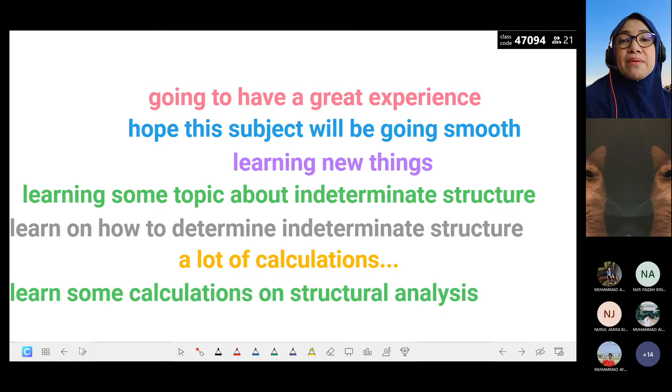Have you heard something about this course previously, from senior maybe? Ada. So what did you hear? Senior cakap susah, senior cakap susah. Quite challenging but interesting. Okay, insyaAllah. Most important thing is you need to actually have strong basics from previous courses, especially from solid mechanics.

Not all topics, certain topics only, especially the beam topic in solid mechanics, as well as some of the topics in the previous indeterminate structure course. If you have all these basics, so this course should be better.

Okay, so this is another question for you to participate. I want you to name, as far as you remember, the name of the topics that you have learned in solid mechanics as well as in indeterminate structure courses. Topics that you have learned previously, whatever topic. Can you please name some of them?

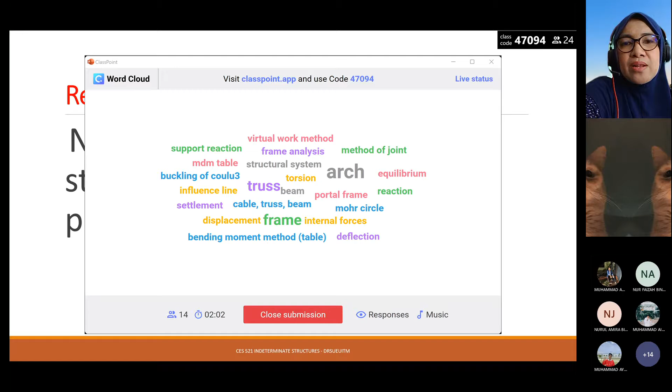Okay, you learn something about equilibrium equation. You use equilibrium equation to determine reaction. Ada reaction kat situ. Method of joint to calculate member forces in truss. Support reaction, so it come from support. Method of section, another method to calculate member forces in truss. Ada lagi?

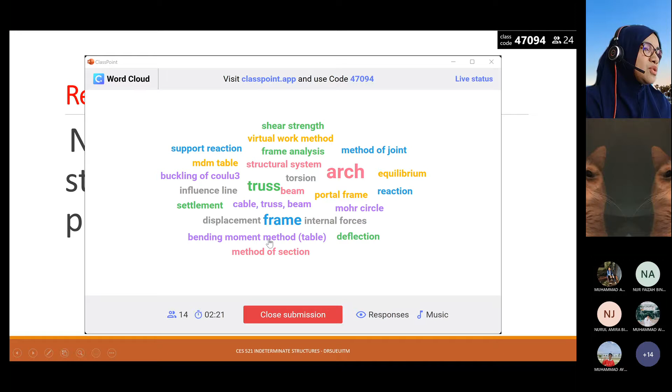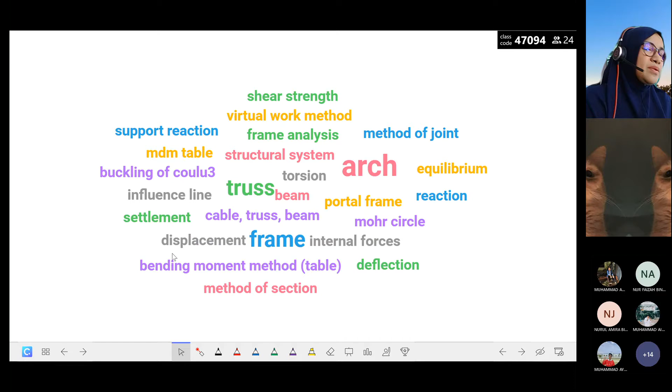Okay, that's good, so this one I want to close right now. Alright, paling ramai jawab arch eh. Okay, so we move to.

Type of determinate structure you have learned previously, some dia dah jawab tadi kan. Okay, because in previous courses, some of the name of the method is actually come from type of structure itself. For example, in solid mechanic, beam as the topic, right? And in determinate structures, arch and cable also as topic, frame as topic, truss as topic.

Okay, but this time, method as topic. So flexibility method as one of the topic, followed by stiffness method, also method as topic, and the last topic in this course is moment distribution method. So all these methods will be used to analyze indeterminate structures. Means we need to analyze beam, we need to analyze truss, we need to analyze frame. For each of the topics we will cover all type of structure, but we don't cover arch and cable. So we just focus on the dominant type of structure, which are beams, frame, as well as trusses.

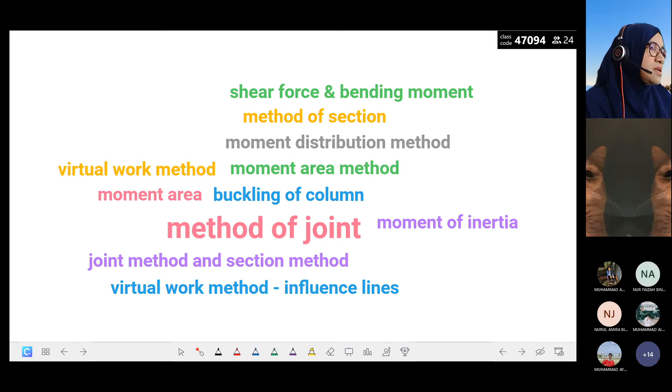Okay, we move to the learning outcome, for this chapter, chapter number 1. So at the end of this chapter, you should be able to,

you should be able to calculate degree of indeterminacy, and identify redundant for indeterminate structure.

Wait. Kita tak boleh highlight pula. Highlight ni pen ni. Kejap. I need to close this and open it back. Wait. Okay, dah boleh tu, lambat sikit. Okay, I will share it again.

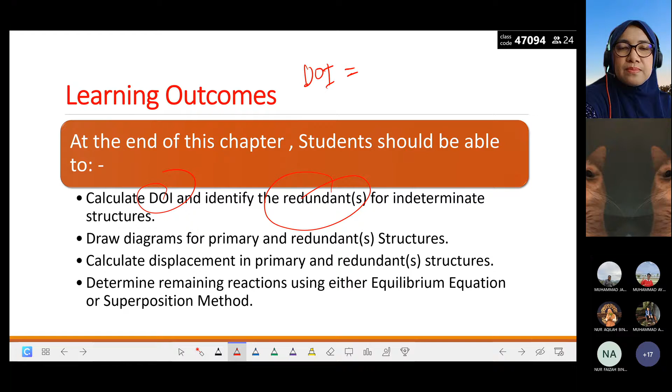So because when you learn how to calculate reaction in determinate structure, you have actually learned how to determine degree of indeterminacy, and degree of indeterminacy for determinate structure is equivalent to, do you still remember? Determinate structure, what is the value? Equal to degree of 0. Yes, it is equal to 0 for determinate structure.

So in indeterminate structure, what is the answer for degree of indeterminacy? More than 0. Okay, it is more than 0. So this is for indeterminate structure, more than 0.

Actually the value that you get whenever you calculate degree of indeterminacy represents redundant in the system, we call it redundant, because whenever we remove redundant, it will equal back to 0. So we call it as redundant.

For example, if we have beam, this is cantilever beam, the one that you have learned previously under previous course. So when I put another roller here, this is equivalent to 1. The value of 1 is actually representing redundant. And whenever we remove 1 from the system, it will go back to determinate condition.

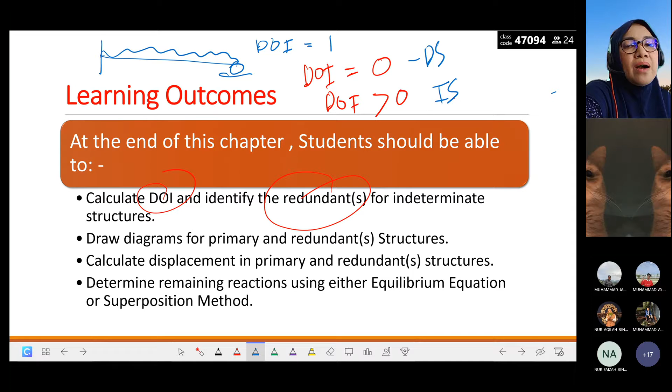Number 2, diagrams for primary and redundant structure. So you should be able to draw the diagram. So we will have diagrams called primary structure and redundant structure, and most of this diagram is actually determinate structure. Primary structure.

Primary structure is a structure after removing redundant from the system. We will analyze the primary structure, and then we also have redundant structure, which is also determinate structure. So all analysis in this topic, we will analyze all reaction, all internal forces and displacement in determinate structure. That is why you need to have a strong basic in analysis of reaction, internal forces as well as displacement, the three things that you have learned previously.

Okay, and then calculate displacement, as I mentioned just now, displacement. And finally, after redundant has been determined, then we will determine reaction in the system.

Remaining reactions means 3. Because in determinate structure, we calculate 3 unknown reactions, and these 3 unknown reactions can be determined using 3 equilibrium equations.

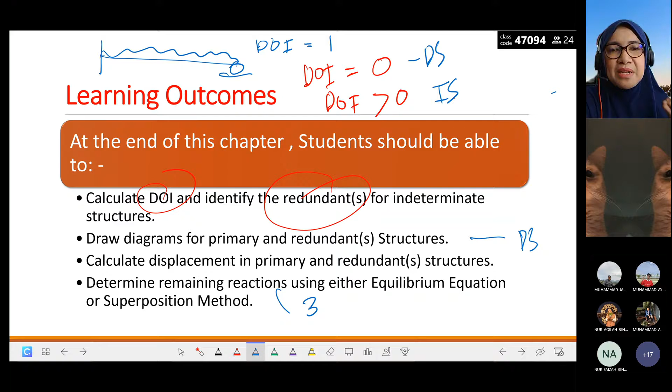If you have a question, you may ask.

So you have learned how to analyze, for example, beam. You have actually learned how to analyze reactions for beam, frame, and truss, and then you have also learned how to calculate internal forces in beam, frame, as well as truss, and then displacement. I believe you have learned how to calculate displacement in the last course, last semester.

So we go directly to introduction. In structural engineering, the flexibility method is actually the classical consistent deformation method for computing member forces and displacement in structural systems. As I said just now, this is in simple words.

When do we need to consider flexibility method? It is when we cannot determine reaction directly, because we can only determine reaction whenever the number of unknown reactions is equivalent to the number of equilibrium equations, meaning 3 and 3. When we have more than 3 unknown reactions, we cannot determine the reaction directly, and that is where the flexibility method takes place. So just remember that we are actually calculating the redundant using flexibility method, and after the redundant has been determined, then we can solve the remaining reactions.

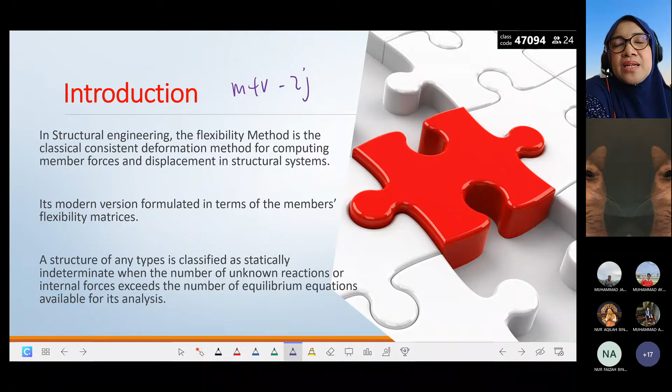So we move to this. As I mentioned just now, this is not the only topic. This is one of the techniques to calculate or analyze indeterminate structure, and flexibility method will take place whenever we cannot determine the reaction directly using equilibrium equation, because the number of unknown reactions is more than 3.

If we want to calculate the reaction or internal forces in frame, we need to consider the internal forces as well, by using the formula I showed to you just now, m plus r minus 2j.

This method is also known as force method. If you have the textbook or e-book for this course, the Hibbeler textbook, RC Hibbeler, structural analysis by Thomson, the distributor for this book, you may not find the topic name flexibility method because it has another name. It is also called force method.

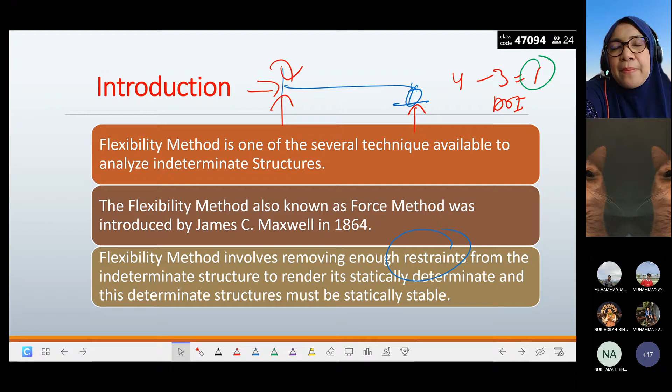Once the redundant is determined, we should be able to calculate the remaining reaction using equilibrium equations as usual. But whenever we want to calculate redundant, it is actually removed from the system. And when we remove redundant from the system, we should make sure that after removing redundant, the structure is statically determinate and stable.

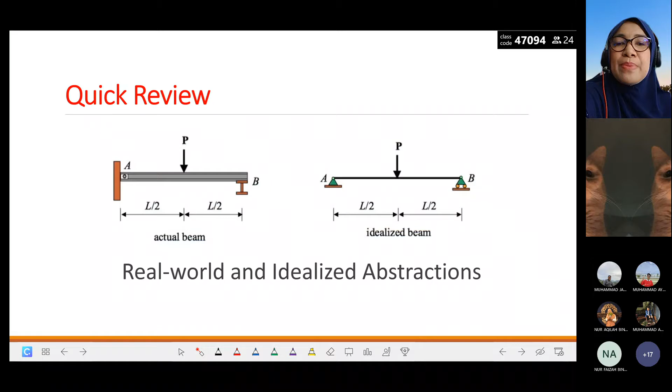This is just a quick review. The idealized beam is the one you always get in analysis, and the actual position, the actual picture of the beam. This one is called simply supported, where we have a pin and a roller.

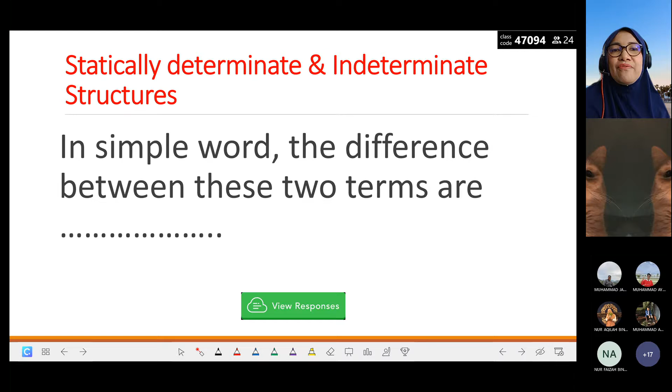So I want to ask your understanding. In your own words, what is actually the difference between these two terms - the difference between determinate structure and indeterminate structure? Relate it back to what you have learned previously and today. Please try to respond to this question.

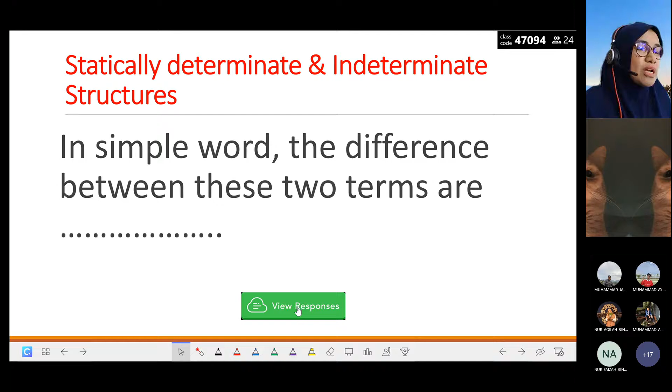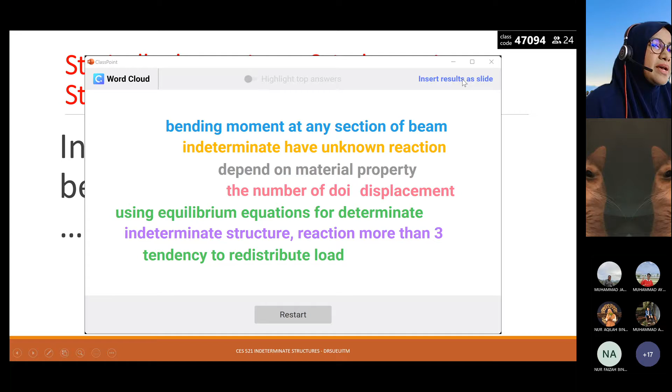Let's restart again.

So what is the difference, in your own words, based on your understanding, between determinate structure and indeterminate structure?

So we can define the structure based on degree of indeterminacy - degree of indeterminacy, degree of freedom. We will look at it in detail in the next chapter.

Other than this, equilibrium equation - when we cannot calculate reaction using equilibrium equation, it means we need to consider using the flexibility method. In static equilibrium, we have a limitation, and the limitation is up to 3. So other than 3, we cannot solve using equilibrium equation. That is why, as I said, flexibility method comes in.

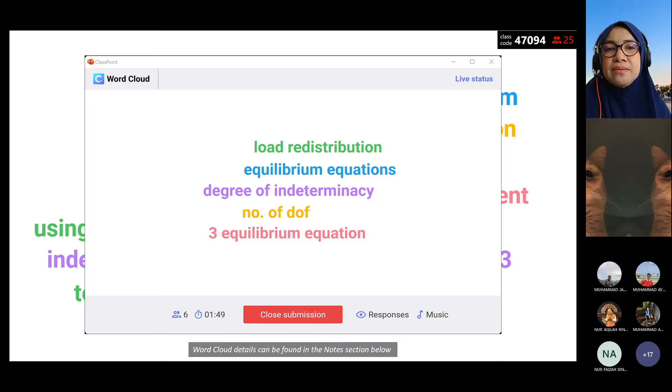Any other answer? The difference between determinate structure and indeterminate structure - load redistribution, anything related to the support condition? Do you have any idea? Of course, bending moment and shear force will be different.

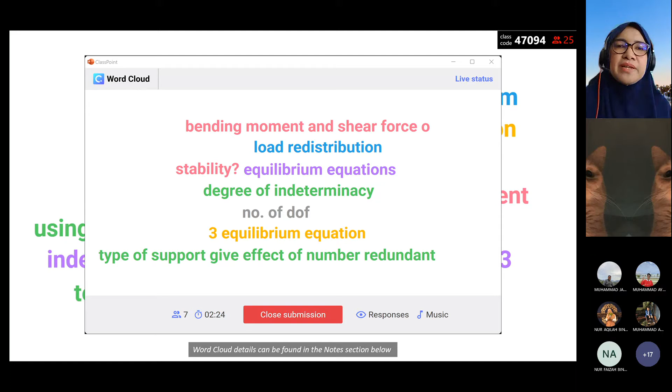In terms of displacement maybe, or in terms of support? Yes, stability as well. The type of support gives effect on the number of redundants. Yes, correct. Any more answer?

What do you understand about determinate structure? Any more answer? Regarding displacement - do you think the displacement for determinate structure and indeterminate structure will be the same or different? Or which one is actually better? Which one has advantages compared to the others?

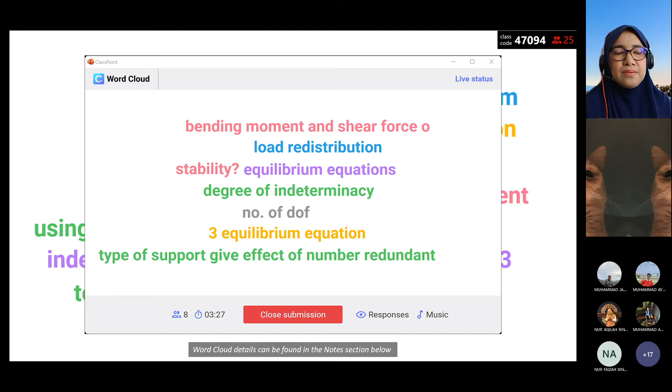Any other answer? No one. Okay, we close this first.

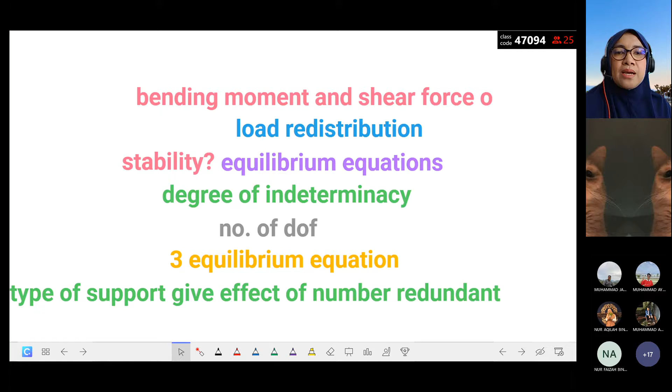Okay, actually, quite a lot of difference between determinate structure and indeterminate structure, especially due to the support condition, due to the displacement, due to the strength of the structure. So there's so many. Okay, so we move to the next one.

Okay, statically determinate and indeterminate structure. So this could be the difference. Okay, for determinate structure, we can use static equilibrium to determine reaction and internal forces. Okay, static equilibrium, so the one that we have actually used.

Start from solid mechanics or start from statics and dynamics. Static, you have learned in the first semester, right? So whenever we want to analyze a structure, actually we have to apply static equilibrium, because we have dynamic conditions too. So static gives the limitations that we need to follow. For example, three equilibrium equations of statics.

So Hooke's law, remember Hooke's law, the one that you have learned maybe in diploma, you have done experiments to see the shape, under tensile test if I'm not mistaken. Okay, then you get the graph, force versus deflection, or we call it the stress-strain curve.

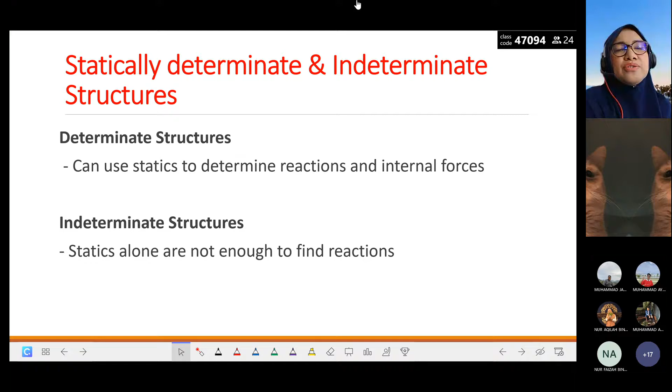Okay, so for determinate structure we can use statics, referring to three equilibrium equations, to determine reaction. Means that we can calculate reaction and internal forces in determinate structure using three equilibrium equations, but we cannot do that for indeterminate structure.

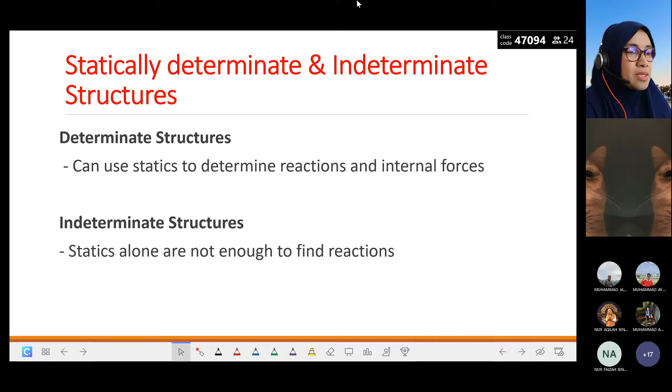Okay, means that we have to have another equation in order to solve for the reaction. This is one of the reasons, one of the differences. Okay, to analyze an indeterminate structure, an additional equation needs to be considered.

Okay, another equation, because equilibrium equations alone cannot be used to identify all the reactions. So we need to have another equation.

And this equation considers actually the geometry of the deflected shape. Okay, we will have another equation which is called the compatibility equation, and the compatibility equation actually comes from the deflected shape of the structure. So this is actually the additional equation that I mentioned just now.

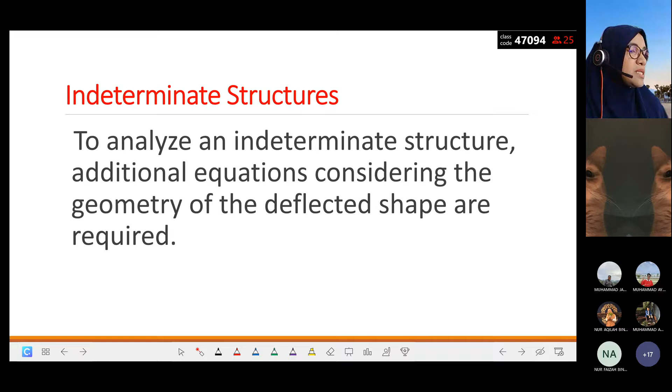Okay, so the benefit of indeterminacy, or benefit of indeterminate structure compared to determinate structure. Number one, okay, of course there are many more, this is only some of the advantages. Okay, number one, indeterminate structures are stiffer than determinate structures.

Okay, do you understand the word stiffer, the word stiff? Do you understand the word stiff? Stiffer than determinate structure. Okay, do you understand the word stiff, the word flexible? Stiff versus flexible, understand, right?

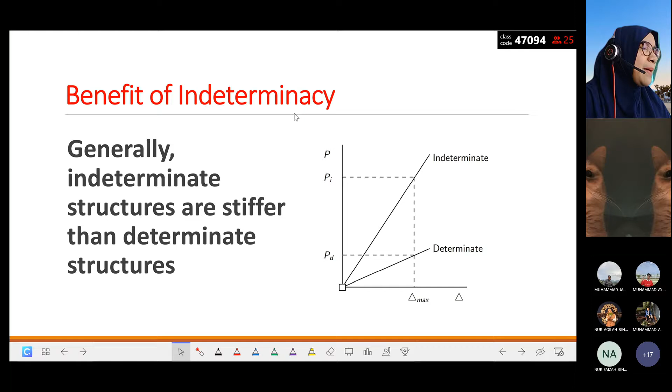Okay, so can you imagine this statement representing indeterminate structures and determinate structures? The indeterminate structure is stiffer than the determinate structure. So what happens if the structure is stiffer than the other one?

Another benefit. Indeterminate structures have a lighter and more rigid structure. Okay, a rigid structure with the addition of redundancy in the structural system. Added redundancy means that it may come from the support.

Okay, because we calculate the degree of indeterminacy based on the support condition, based on the support condition. And in trusses also we have to consider as well the member forces.

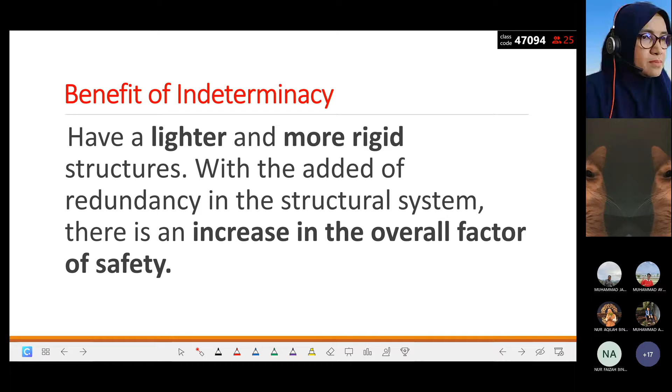Okay, and another reason is the increase in the overall factor of safety when we have an indeterminate structure. Okay, so I hope you understand the...

Okay, that the indeterminate structure, in terms of rigidity, okay, in terms of rigidity, it is more rigid compared to determinate structure.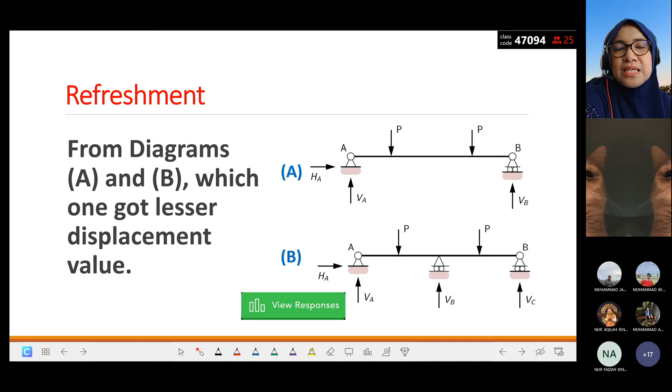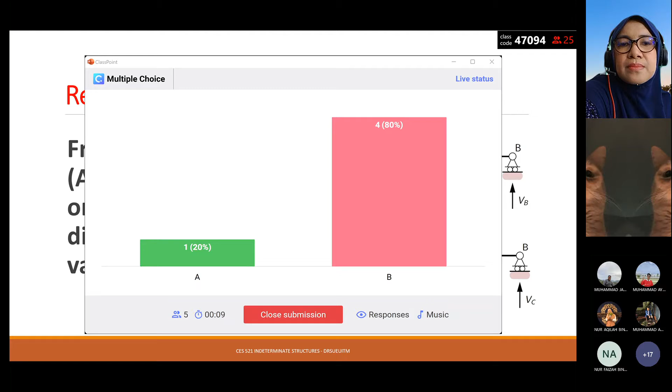So from the diagram, which one has a lesser displacement value? Okay, which one got lesser displacement value? Diagram A is a determinate beam, diagram B is an indeterminate beam. So what do you think in terms of displacement? Which diagram got lesser displacement?

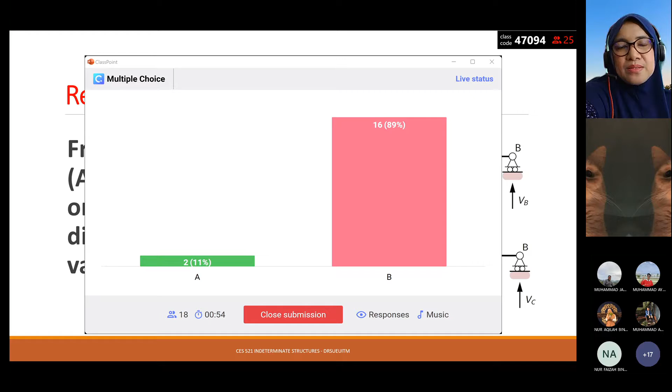Okay, so it should be B. Indeterminate structure will have less displacement compared to determinate structure.

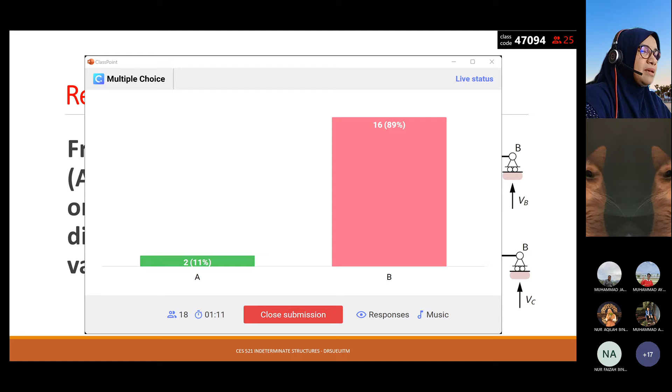Okay, so we move on. You have to understand the support characteristics because reactions come from support conditions. In order to remove a redundant later on when we analyze the structure, removing a redundant means changing the support condition. So you need to understand the concept of support, where a pin has two unknown reactions, X and Y. If we want to remove one redundant or one reaction from a pin, so which one should be removed?

Can we just remove any one that we like, or should we remove AX rather than AY? So the concept must be clear.

For example, if we have a pin support and a fixed support, the fixed support has moment at A, AY and AX. So if we want to remove one redundant, which one should we remove first? Can we simply remove from the fixed support? Can we simply remove AY, or we cannot?

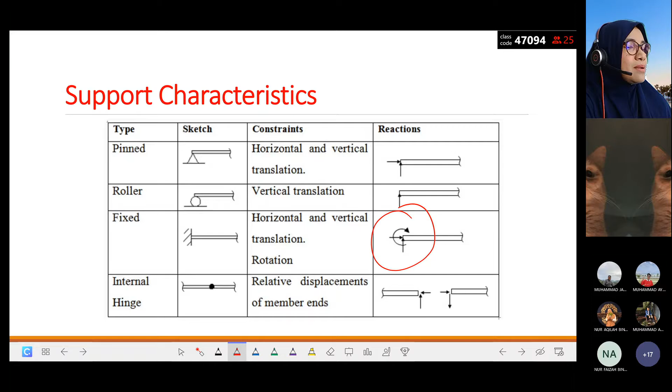So we have to understand the support characteristics before we identify the redundant, because remember, redundant means something we remove from the system.

Okay, so now in flexibility method, we need to satisfy what we call a principle, or equation, or relationship. In order to analyze structures using flexibility method, number one, we need to satisfy equilibrium equation. This is the one you have learned previously, equilibrium equation, meaning we apply equilibrium equations in order to analyze the reactions later on.

Condition number two that we really need to consider is the one I mentioned just now, it is called compatibility.

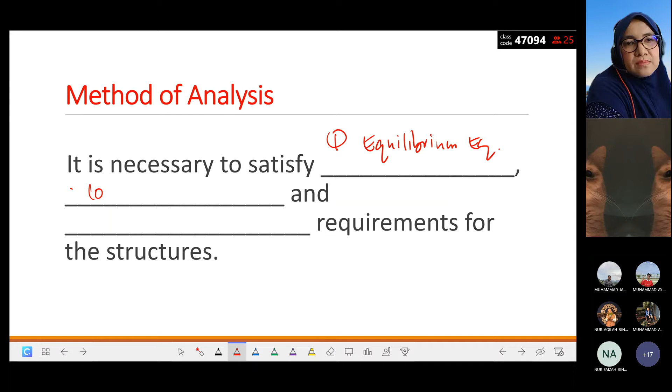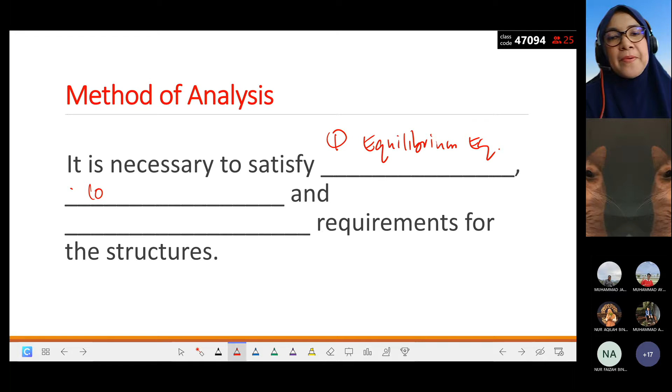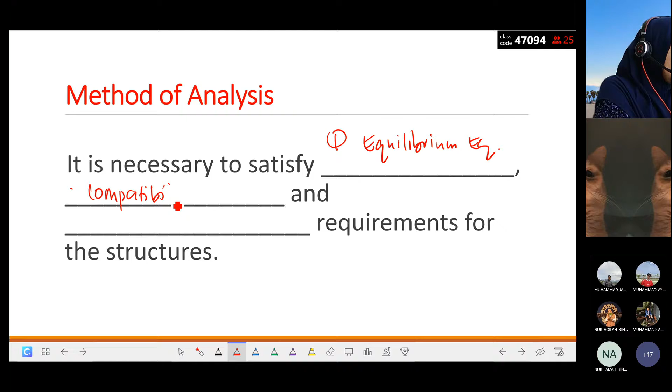And the third one is actually force-displacement relationship. So number one is equilibrium equation, number two is compatibility equation.

Number one, equilibrium equation as usual, when we apply total moment, total Fy, total Fx. And then we have compatibility, which relates with the geometry of the deflected shape of the structure. And the third one is force displacement.

We can also call it an equation, or a relation, force displacement. Equilibrium equation, compatibility relates with displacement geometry of the structure, and the last one is force displacement equation or relation. So these three principles should be fulfilled whenever we analyze an indeterminate structure using flexibility method.

Actually, you have already met two of these, number one and number three. This one and this one, force displacement. Compatibility is new for you. Force displacement, you have actually met this before.

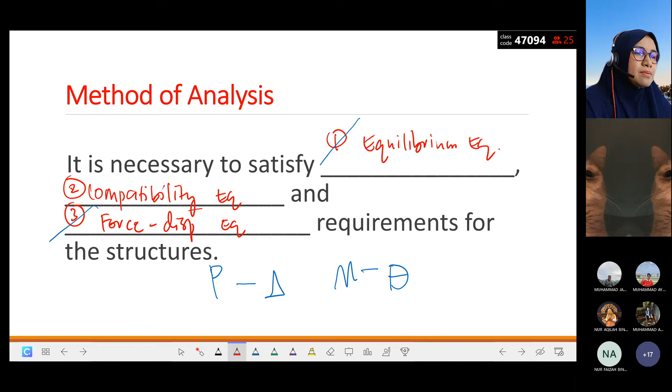Correct? What if you want to calculate rotation? For rotation, you apply one unit moment. So this is actually displacement, delta and rotation are displacement.

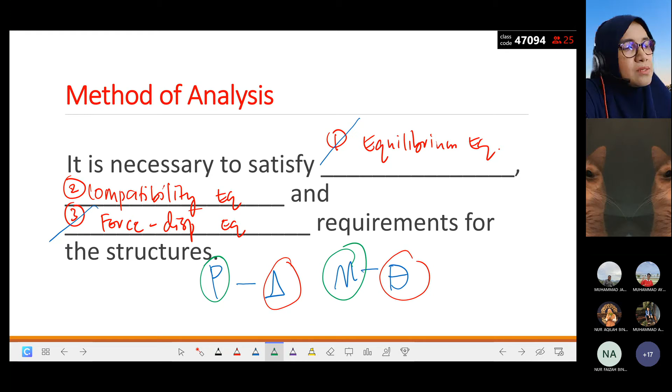And P as well as M, these two are forces, isn't it? Correct. So this means you have actually learned about the force displacement equation or relationship in last semester. P, a unit value of P, this is actually force, maybe a horizontal force or vertical force. Whenever you want to calculate deflection, and you apply moment whenever you want to calculate rotation. So this is actually force displacement relation.

So the new thing you need to understand in flexibility method is the compatibility equation. Compatibility equation relates with displacement geometry, it will relate with displacement in order to have the equation to solve for the redundant.

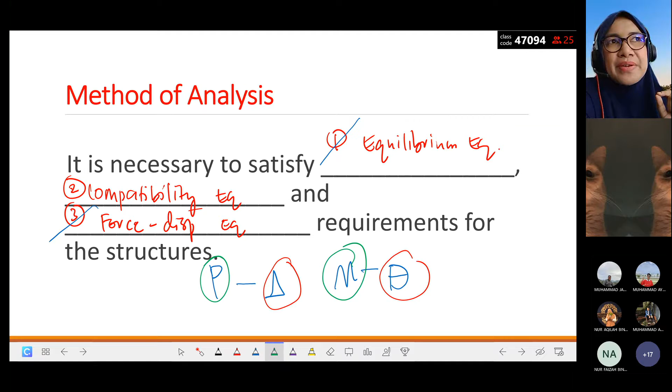So next, any questions? Do you want me to take a break for a while, maybe 5 minutes, or do you want me to continue?

Continue, continue, okay, so continue, yeah. Okay, of course.

There is a general procedure, but I don't want you to actually remember the steps, because there are so many things to remember. This is the topic where everything you have learned previously comes together: analysis of reaction for beam, frame, truss, then internal forces. Internal forces have moment equation, method of joint, frame analysis, shear force diagram, and moment diagram. There are so many things.

So what I want you to do is to set your aim. Set your aim means you have to look at your final goal. Anything we do, we do for reasons. Why do I need to do this step? This is for this. You must have the answer for everything that you do. So set our aim first.

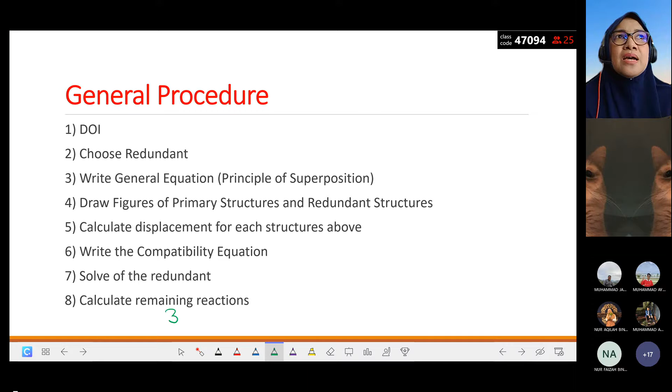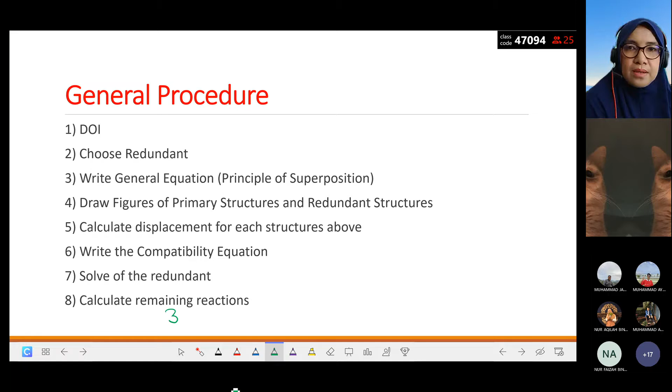So if you see number 8, the final one, calculate remaining reaction means 3 remaining reactions. So if we have the value of redundant from the previous step, can we determine the remaining reaction? Can we? Yes, using equilibrium equation.

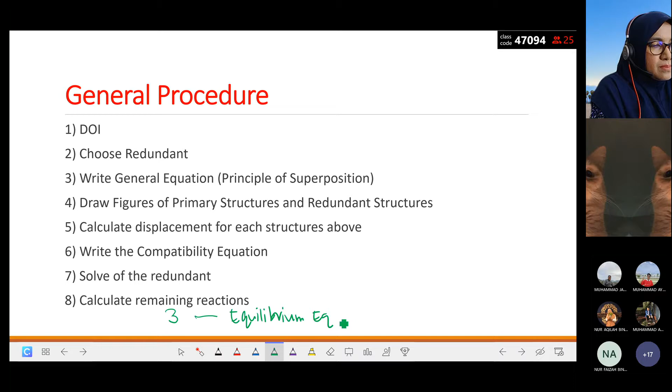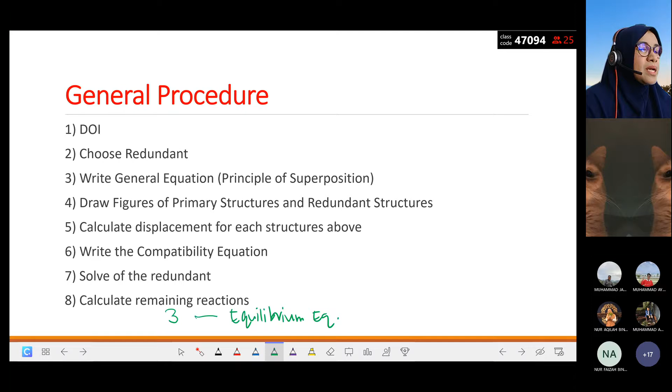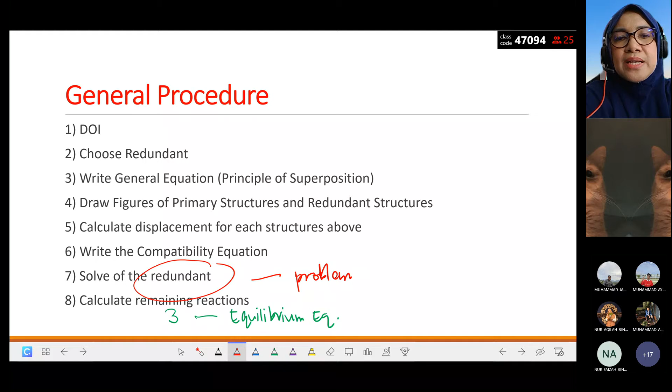But before we can calculate the 3 reactions from total reaction in an indeterminate structure, we should be able to solve or determine the redundant forces first. This is actually the problem. We should understand that we have our aim, our goal, and in order to achieve our aim, of course there will be a problem, or many problems, or one or two problems.

So our aim is to analyze or calculate the remaining 3 reactions. Before we can determine these 3 remaining reactions using equilibrium equations, we have to determine the redundant first. So now redundant is the problem. What we need to do is determine the redundant.

How to determine redundant? How to determine redundant? You see the arrow? Using compatibility equation. Yes, we will solve the redundant using compatibility equation. This is the only way to calculate redundant. We solve redundant using compatibility equation.

And the compatibility equation comes from displacement. You see that above? Displacement means that to have the compatibility equation, we should calculate displacement first, displacement for each structure, for all determinate structures.

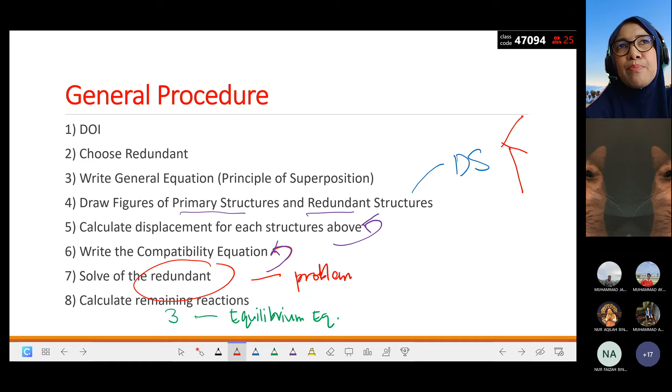Determinate structure and indeterminate structure, we have to do 1, 2, 3. Can you recall or give a summary from previous courses you've learned, in simple words? You have done this from diploma as well. In structural analysis, what are the outputs? Loading is input, support is input, material is input. In structural analysis, there are 3 types of output. If you model the structure using software, you put in all the inputs, draw the model, run the model, and you will get outputs. So what are the 3 outputs you get from analysis?

What are the 3 outputs? Internal forces - that's output number 2. Support reaction - number 1 should be support reaction. Number 2 is internal forces. Number 3? Displacement. Displacement.

Whatever you learn, starting from statics, then solid mechanics, then determinate structure, then indeterminate structure, you are actually determining 3 types of output. Number 1 is called support reactions. Number 2 is internal forces. So in beam and frame, what type of internal forces have you learned?

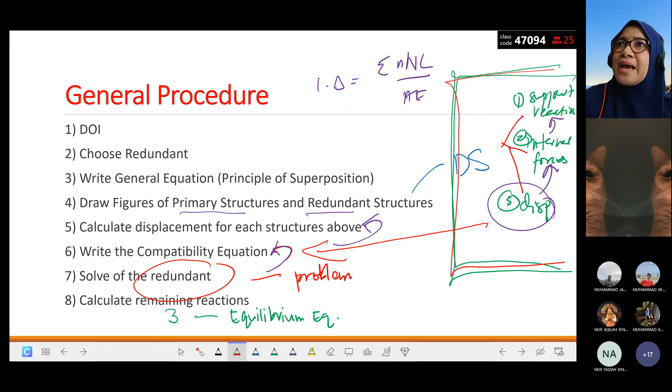Okay, that is why I say you have to have the aim. You have to understand flexibility method. What is your aim actually? So at the end of this topic, what is the attainment that you should get? So the attainment is you should be able to determine redundant. So it doesn't matter whatever method that you use in order to determine the internal forces. Do you get the idea? Means that kalau you masih nak calculate member forces using method of joint or method of section, you akan take some time buat benda tu. But what most important is the value, because the value tu yang kita nak letak dalam formula. Do you get what I mean? So some of the students, bila they having problem dengan flexibility method, dia ada problem dengan the basic concept.

But if you have all the basics, so this one should be easier. Okay, means that at this time, bila you masuk indeterminate structure, the internal forces in truss, you should be able to determine the member forces using easy method. Easy method of course dia bukan satu standard method, name of the method, tapi ada satu teknik yang we call as easy method, so that using that method you can get the member forces easily. Within 2 or 3 minutes you can have all the member forces. Okay? So that is the idea, that is the concept.

Sama juga macam moment equation. Moment equation, in order to solve displacement, so displacement for beam kan, kita akan integrate like this, integrate moment equation. Integrate two moment equation. So yang ni I just take the formula directly first. Okay, this is actually the formula to calculate displacement in beam and frame. In beam and frame, moment equation, two moment equation. So moment equation sama juga masa belajar beam, moment equation tu is your learning outcome. Learning outcome maksudnya masa belajar beam, memang learning outcome dia students should be able to write moment equation. You get what I mean?

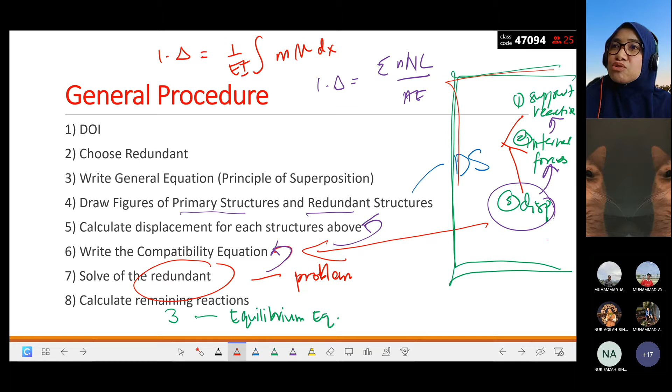Yes, madam. Okay, but in this course, learning moment equation tu is not the outcome. Okay, means that you don't need actually to show the final moment equation, because that final moment equation you need to substitute into the formula of displacement. So we want the moment equation because we want to have the displacement, because displacement is needed in order to fill in the compatibility equation, and after that we can solve the redundant.

So you have to understand this general procedure, step by step. Okay, so bear in your mind. So objektif kita apa? Objektif kita to calculate reaction. So what is the problem? The problem is redundant. So how to determine redundant using compatibility equation? What is inside the compatibility equation? It is all displacement in system, primary system and redundant system.

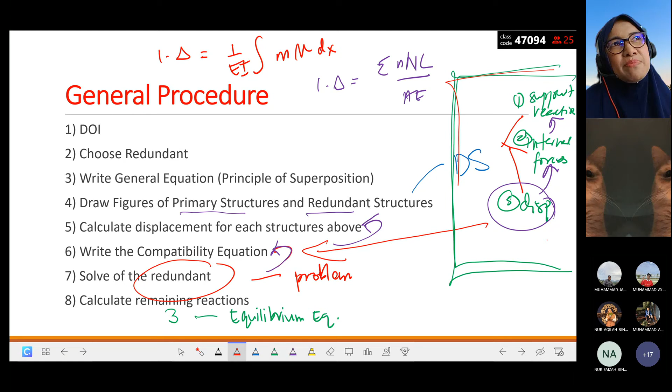What do we need to do in all this system? We will calculate reaction, we will calculate the internal forces in order to substitute into the displacement formula. Every procedure has a reason. That is why what you need to do is actually understand what is your aim, meaning the learning outcome, and then go backward.

Look at step number 8. Why do I have to have remaining reaction? Because there are 4 unknown reactions. I want to solve 4 unknown reactions, but these cannot be calculated using equilibrium equations alone. So I have to apply the flexibility method. One redundant can be determined using the compatibility equation.

How to solve the compatibility equation? By having displacement in systems, the determinate system is called the primary system and redundant system. So how do we write the compatibility equation based on what we call the principle of superposition?

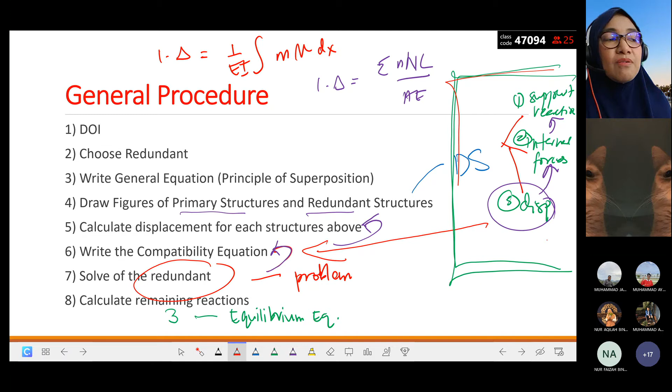Here we apply principle of superposition. In order to write the principle of superposition equation, we should determine or choose the redundant first. So how do we get the redundant? We get it from the degree of indeterminacy.

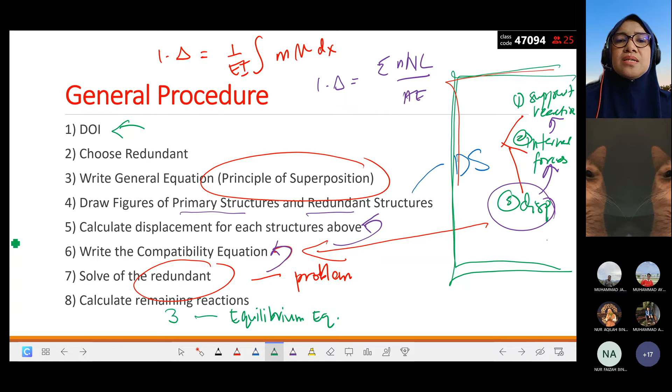Okay, so let's move on. Of course in this first class, I will focus on the concept first. I won't do a full example. Later for the full example, I will make a video for one example, so that you can watch the video and then we will do an example maybe in the next class.

Okay, so this is the principle of superposition, the idea of principle of superposition. Because principle of superposition, we don't only apply it in the flexibility method. It is actually one of the principles that is very common in engineering. We will apply the principle of superposition also in chapter 3, not only in this chapter.

The idea is, when we have an indeterminate structure, we have to separate it, to divide the structure into determinate structures. It may be 2, it may be 3, it may be 4. And in order to apply the principle of superposition, as usual in static equilibrium condition, we have all these principles.

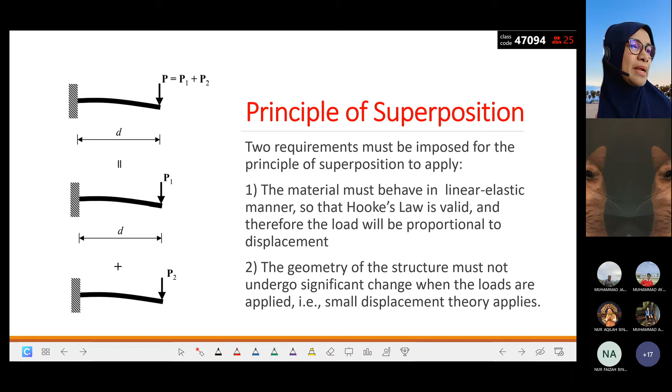The material must behave in a linear elastic manner so that Hooke's law is valid. This we already learned earlier. The geometry of the structure must not undergo significant change when the loads are applied, so the small displacement theory applies. So these are all the principles. I don't want to elaborate more here, let's move to this.

Okay, so move back to the concept. What is actually the flexibility method? What is the flexibility method? Who can try to answer?

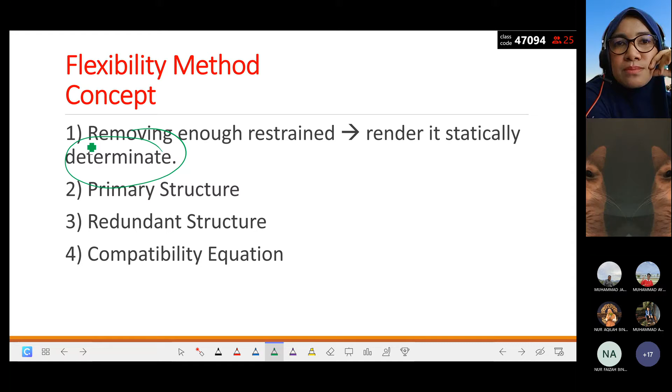Boleh tak you ingat yang tu? Boleh. Okay, when we have, for example, this. Okay, 1, 2, 3, 4.

Okay, degree of indeterminacy is equal to 1, because we have 4 unknown reaction and only 3 can be solved using equilibrium equation. So redundant is 1. Redundant is 1.

So what we need to do with redundant? We want to remove. Remove redundant, remove restraint. Means that after we remove restraint, we will have determinate beam. Nampak tak? Remove restraint, we get determinate beam.

Remove roller, we get cantilever beam. Do you get the idea? Tadi ada roller kan? Ada roller sini. Ada roller. So dekat roller tu ada reaction, right?

Reaction. Remove enough restraint means remove one of the reaction. Okay, remove one of the reaction. So remove BY. So when we remove BY, it become cantilever beam.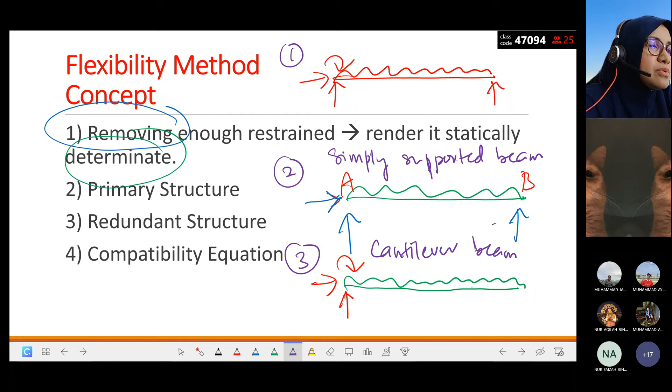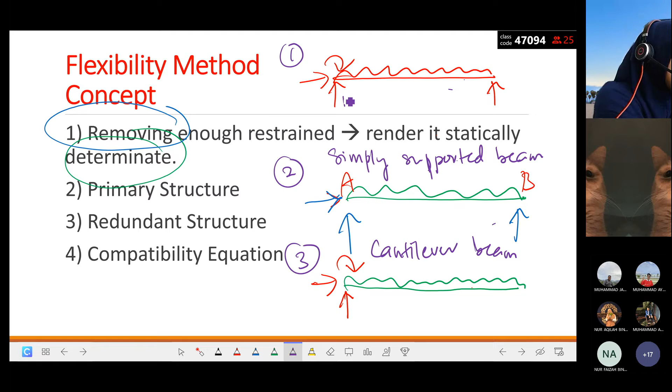Cantilever. Yes, it is cantilever beam. So if we have, okay, indeterminate structure in diagram 1, okay, where we have AY, AX, and MA, and then we have BY.

Okay, diagram number 2 is simply supported beam, whenever we remove MA from the beam. Okay, means that to get A, we actually are removing MA. Sini kan redundant dia ni is MA.

Okay, diagram number 2, which is actually simply supported beam, we get after we remove MA. So MA is the redundant. Okay, diagram number 3, redundant for this diagram is what? BY. So we have removed BY so that after removing BY we get cantilever beam.

We get cantilever beam. So 2 and 3 ni is actually called as possible primary structure. 2 and 3 is actually called as this. There are 2 possibilities for one redundant.

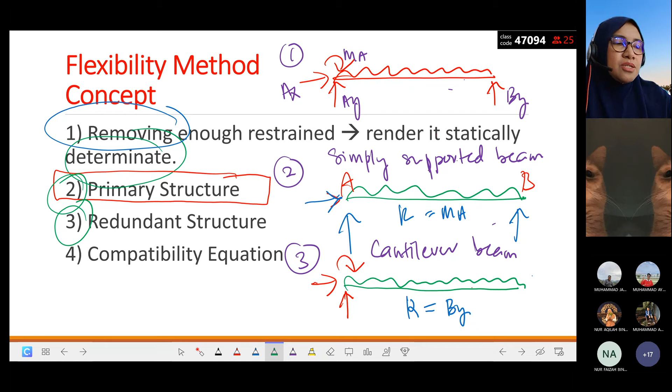Okay, and then compatibility equation we will get whenever we analyze displacement for primary structure and for redundant structure. So ni konsep-konsep yang you kena faham. InsyaAllah nanti kalau you try to understand whatever I have explained to you, InsyaAllah bila buat example nanti you akan get clearer picture.

InsyaAllah. Okay, so this is the compatibility equation. Yang ni dah sebut tadi, P dengan delta, M dengan theta. Okay, so yang ni saya akan buat satu video and nanti tengoklah bila-bila you free before next week. Please tengok macam mana saya akan analyze this simple beam one single span, okay, to determine the reaction at A and at B.

Okay, so now do you have any question? Do you have any question?

Tak ada. Nope. Okay, nanti tengok balik.